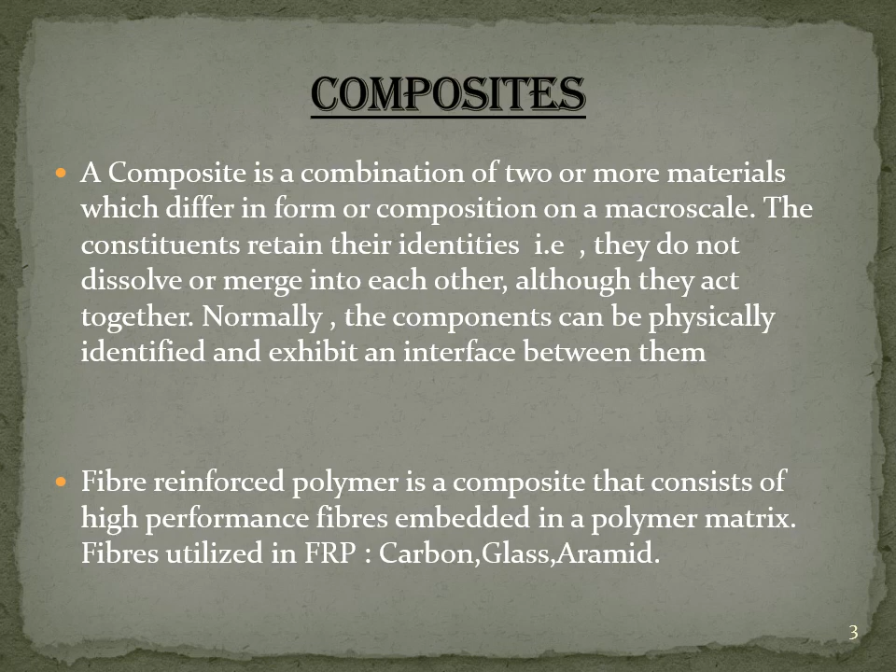They are commonly known as a new class of advanced materials which are different in many aspects from traditional materials such as metal, ceramics, plastics. They are made in such a way that they provide extremely high strength with sufficient stiffness and toughness with light weight. It is a material in which one material acts as matrix mixed with another material acting as filler, which serves the purpose of increasing strength and other mechanical properties, but at the same time reducing the overall density of this new material.

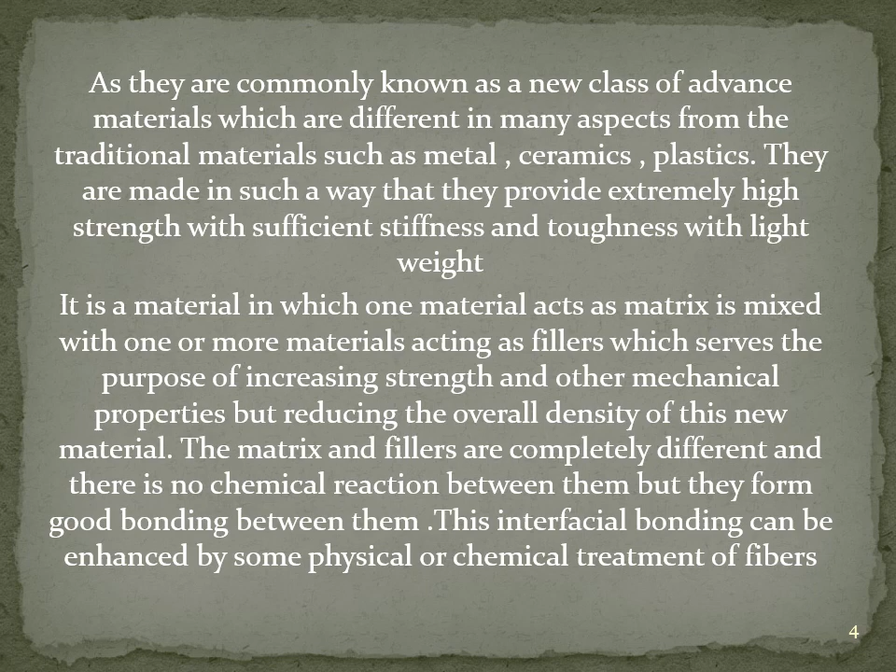The matrix and fillers are completely different and there is no chemical reaction between them, but they form good bonding between them. This interfacial bonding can be enhanced by some physical or chemical treatment of fibers.

Here is a picture. The blue cuboid represents the matrix in a continuous phase and the dark blue lines inside it represent the filler in dispersed phase. So here is a composite which is made by adding fillers into a matrix. Composite equals matrix plus filler.

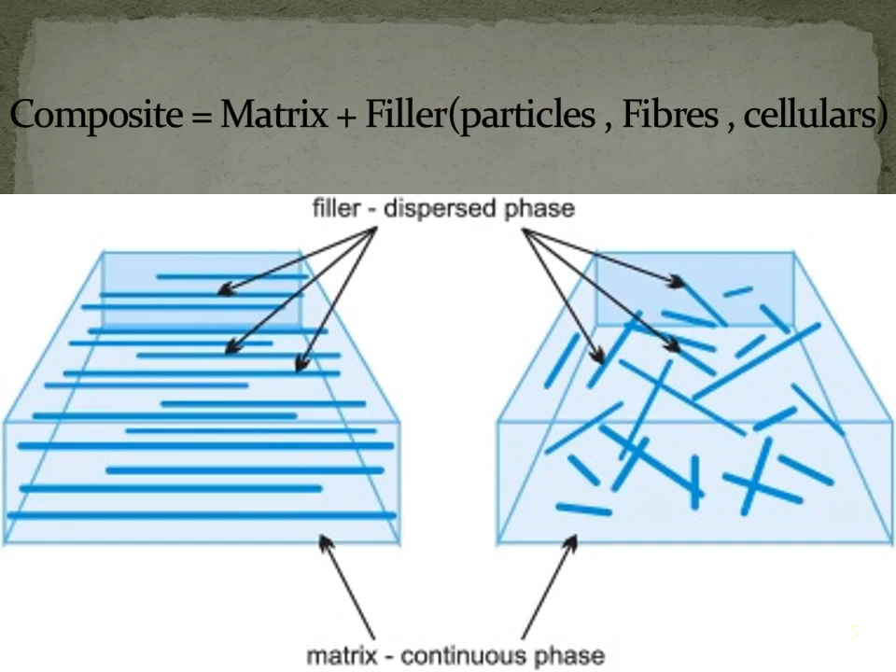What is FRP, that is fiber reinforced polymer? It is a composite material made of polymer matrix reinforced with fibers. The fibers are usually glass, carbon, aramid or basalt. Rarely other fibers such as paper, wood or asbestos have been used. The polymer is usually an epoxy, vinyl ester, polyester, or thermosetting plastic. Thermosetting plastic, as we all know, is a polymer that irreversibly becomes rigid when heated.

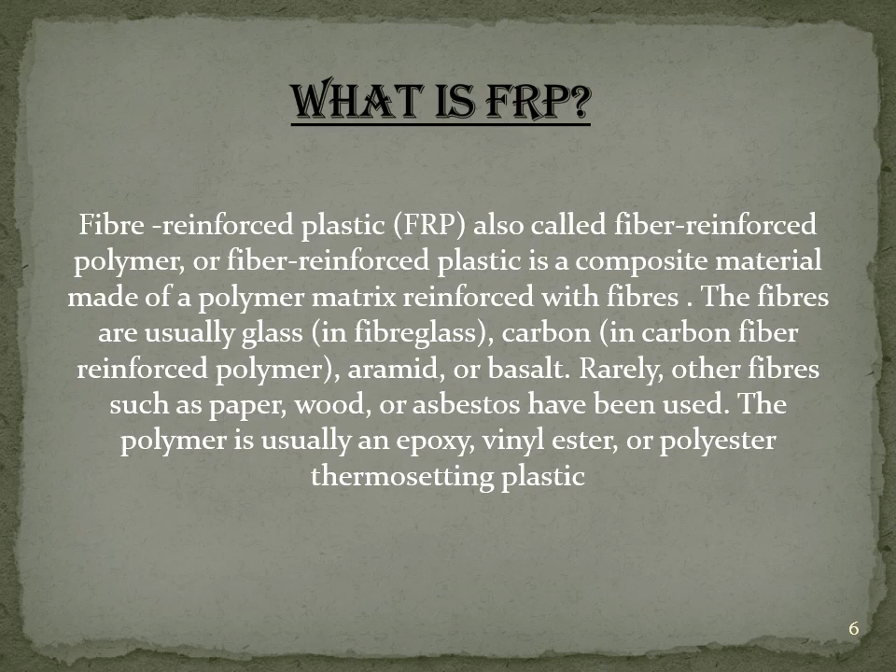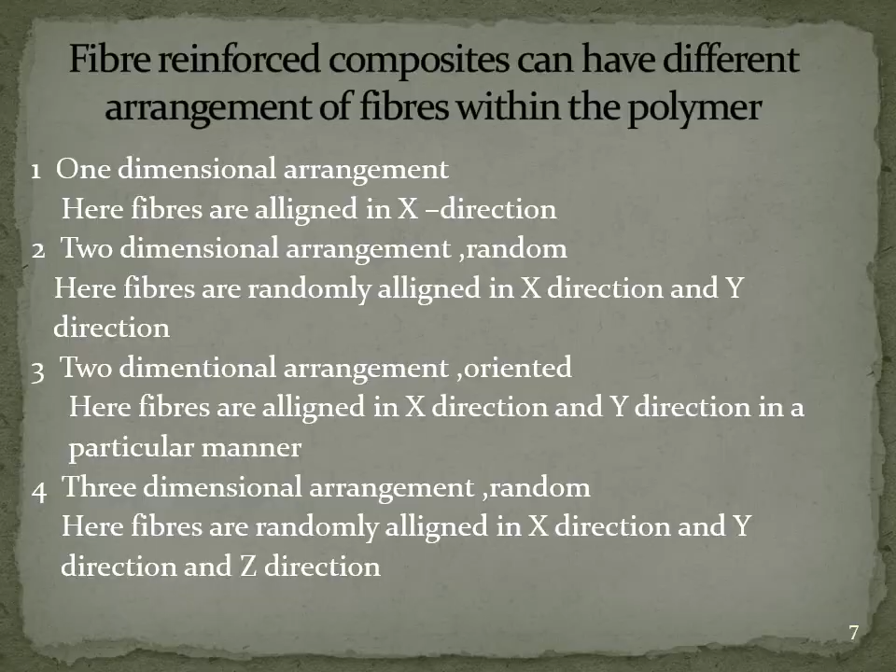Fiber reinforced composites can have different arrangements of fibers within the polymer: one-dimensional arrangement, two-dimensional arrangement, which is further classified as random and oriented, and three-dimensional arrangement. I will explain all this with the help of a diagram representing these four classifications.

Diagram A represents a matrix in one dimension, where all the fibers are aligned in the X direction. Diagram B represents a two-dimensional structure where fibers are arranged in X and Y direction but in random order. Diagram C represents fibers arranged in two-dimensional order, aligned in X and Y direction, and oriented. Figure D represents fibers aligned in X, Y and Z direction randomly.

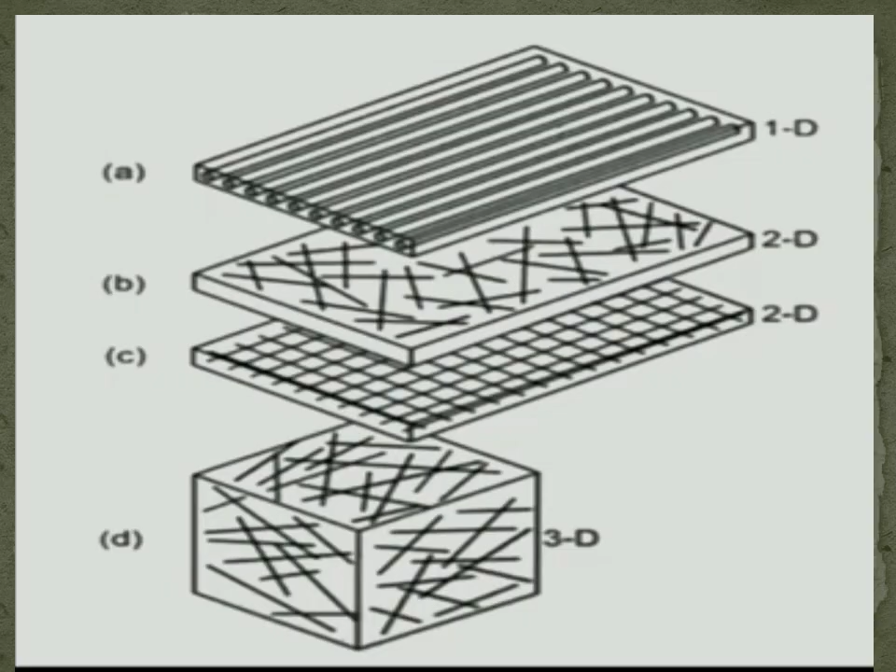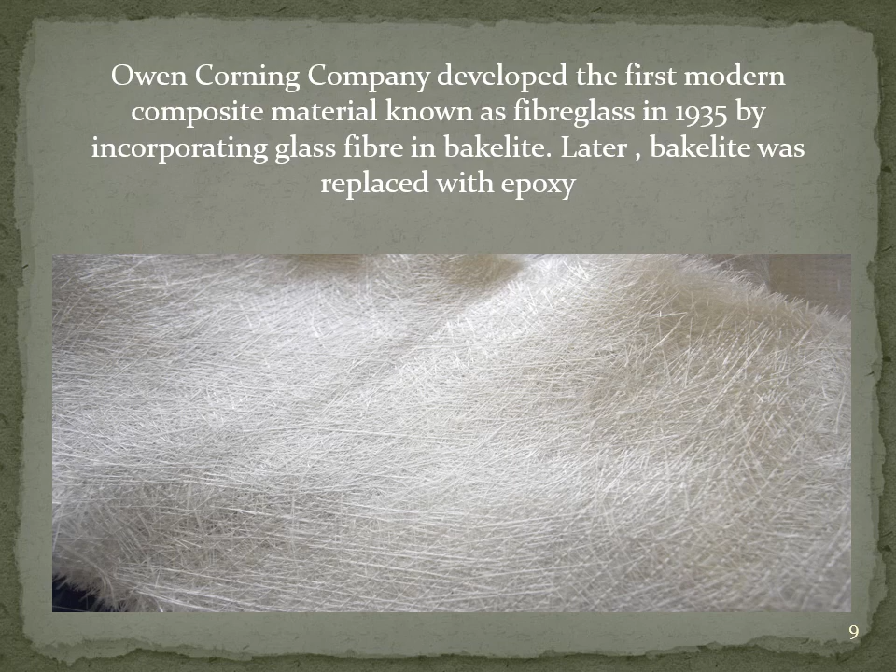Owen Corning Company developed the first modern composite material known as fiberglass in 1935 by incorporating glass fiber in bakelite. Later, bakelite was replaced with epoxy.

There are four main ingredients that fiber reinforced polymer are comprised of: resins, reinforcements, fillers, and additives or modifiers. Each ingredient is equally important and all ingredients play an important role in determining the properties of the fiber reinforced polymer.

First is resin. The primary functions of the resin are to transfer stress between the reinforcing fibers, act as a glue to hold the fibers together, and protect the fibers from mechanical and environmental damage.

Resins are divided into two major groups known as thermoset and thermoplastic. Thermoplastic resins become soft when heated and may be shaped or molded while in a heated semi-fluid state, becoming rigid when cool. Thermoset resins, on the other hand, are usually liquid or low melting point solids in their initial form.

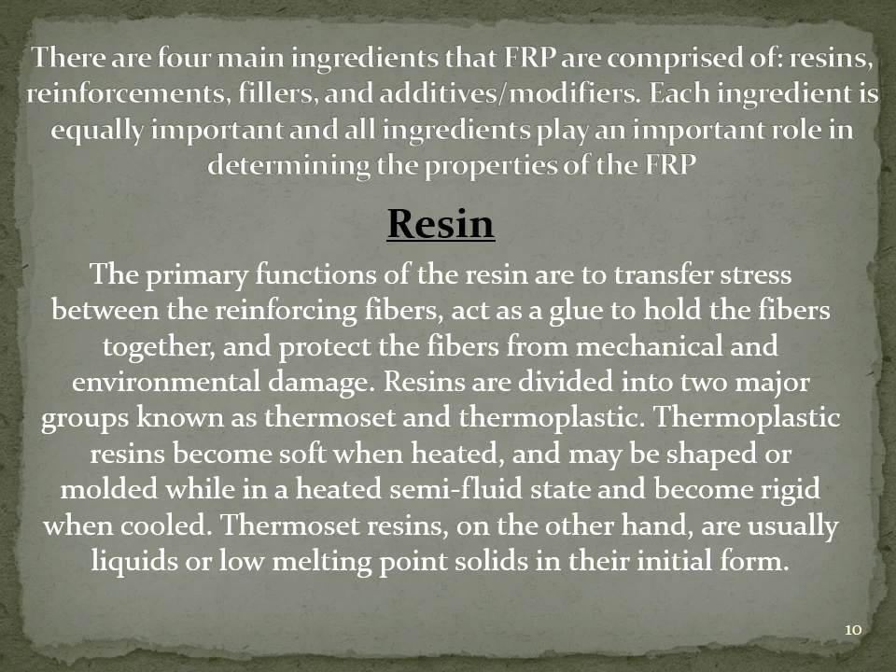Now the reinforcement, fibers and forms. Generally speaking, there are four common types of fibers broadly used in the fiber reinforced polymer industry: glass, carbon, natural, and aramid. Each has their advantage and application.

Similarly, reinforcements are available in forms to serve a wide range of processes, service and product requirements. Common materials used as reinforcement include woven roving, milled fibers, chopped strand, continuous chopped, and thermoformable mat. Reinforcement materials can be designed with unique fiber architectures and be preformed, shaped depending upon the product requirements and the manufacturing process.

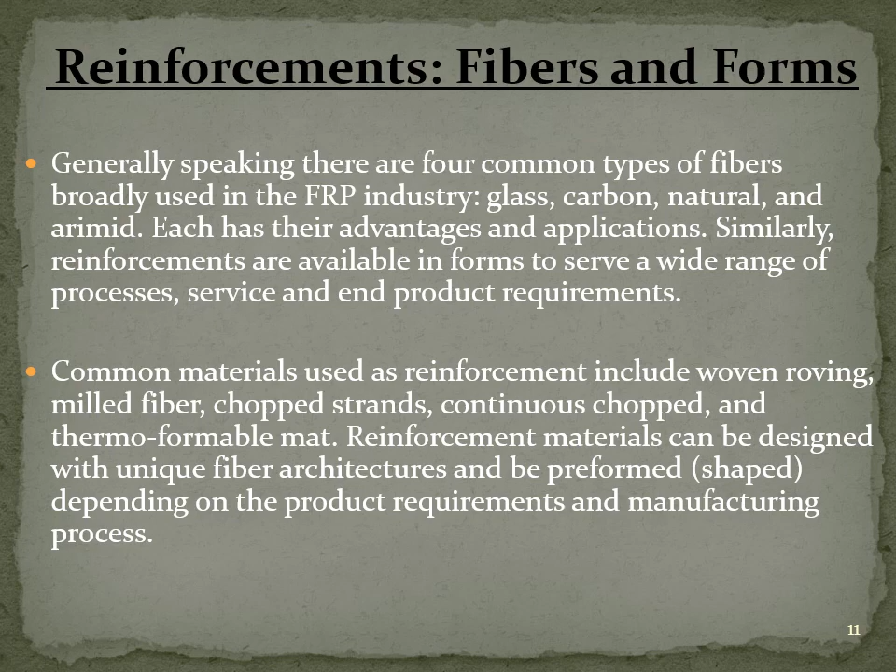Additives and modifiers perform critical functions despite their relatively low quantity by weight when compared to other ingredients such as resins, reinforcements, and fillers. Some additives used in thermoset and thermoplastic composites include low shrink or low profile when a smooth surface is required, fire resistance, air release, emission control, viscosity control, and electrical conductivity.

An important note is that fiber reinforced polymer products can be custom made for the intended use. This is very important. Understanding the intended function and service of the fiber reinforced polymer will aid the design and manufacturing process to allow for an optimal finished product, that is, corrosion resistance.

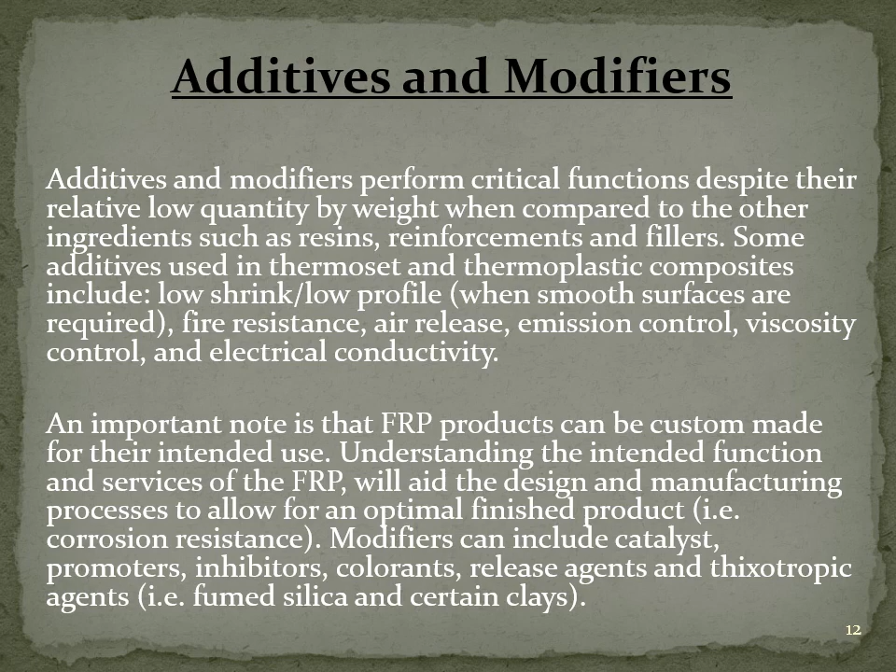Modifiers can include catalysts, promoters, inhibitors, colorants, release agents, thixotropic agents, that is fumed silica, and certain clays.

Fillers are used as process or performance aids to impart special properties to the end product. Some examples of inorganic fillers include calcium carbonate, hydrous aluminum silicate, alumina trihydrate, and calcium sulfate.

In some circumstances, fillers and additives can play a critical role in lowering the cost of the compound by diluting expensive resins and reducing the amount of reinforcements.

Furthermore, fillers and additives improve compound rheology, fiber loading uniformity, enhance mechanical and chemical performance, and reduce shrinkage.

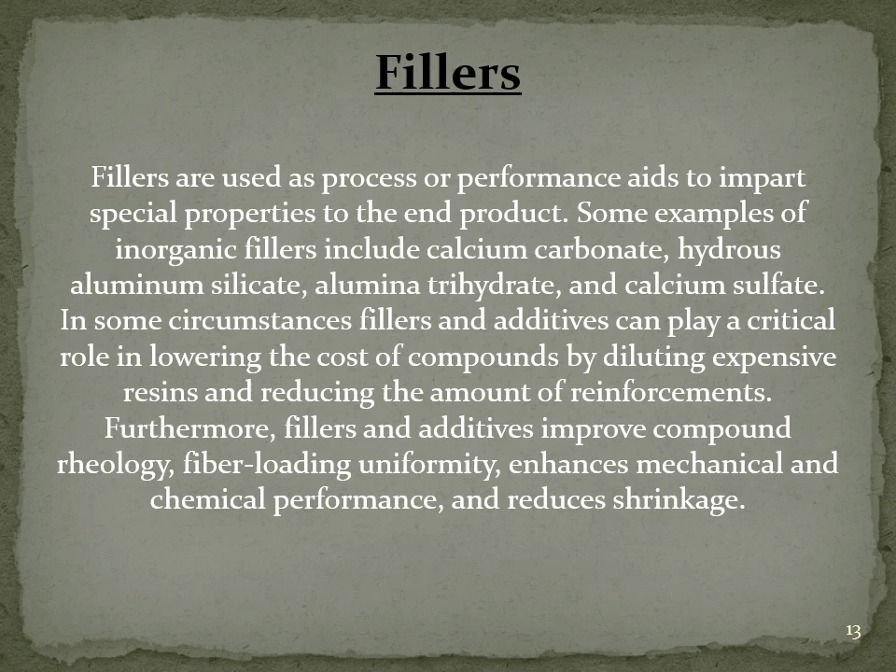Now we come to the manufacturing of fiber reinforced polymer composites. These are a type of composite plastic made up of a matrix or binding agent reinforced by a fiber material. The fiber reinforced polymer process thus entails two steps. Step number one, making the fibrous material. Step number two, bonding the material with the polymer plastic. So here are the processes.

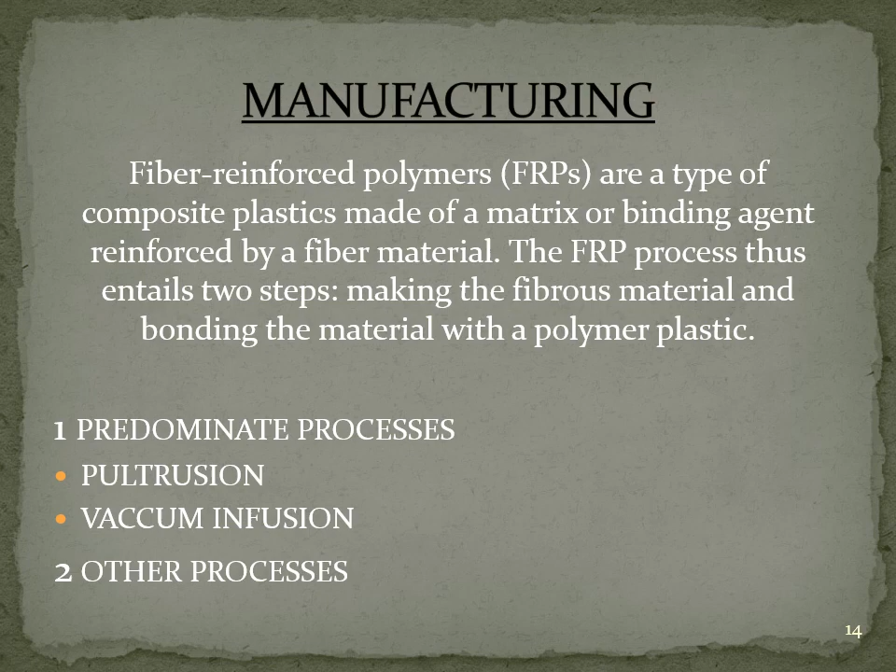Predominant processes include pultrusion, vacuum infusion, and there are many other processes. The pultrusion process involves a linear and continuous process, reinforcing pulled through a heated die. Chemical reaction occurs as it cures, polymerization. The resin saturates the reinforcement, exiting the die in a solid state and in the form of the cross section of the die.

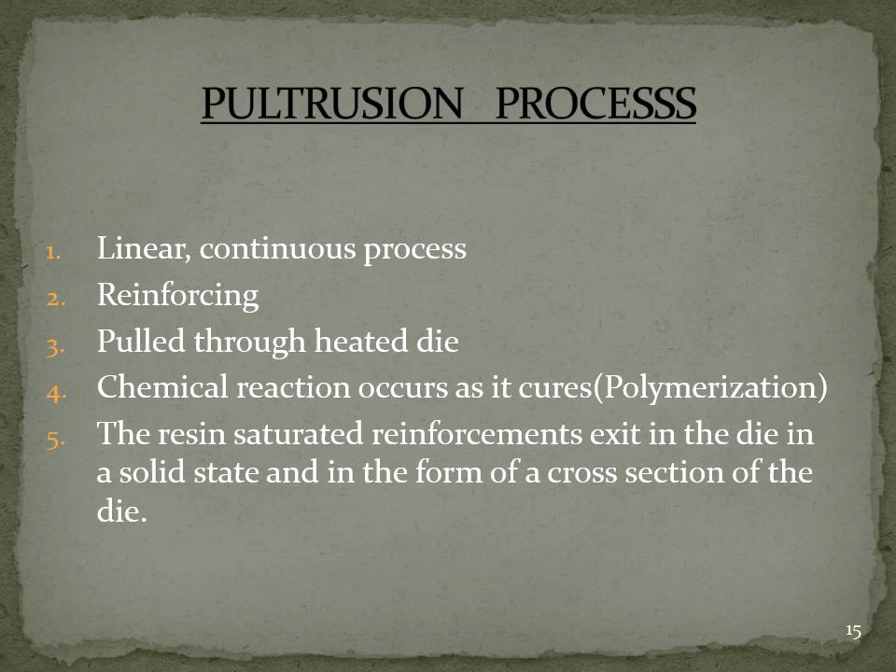Here's a diagram representing the process. And the process is a continuous process.

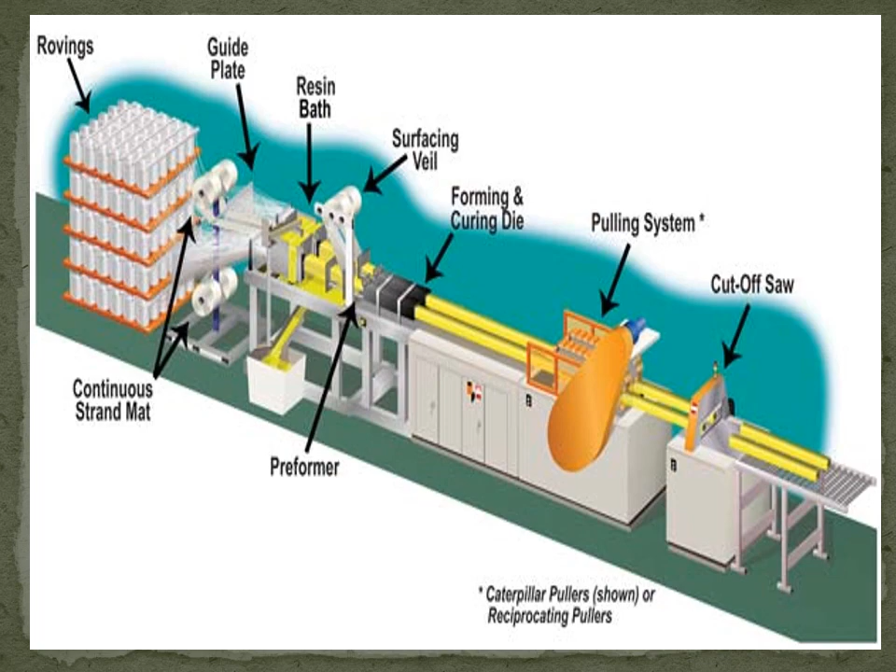Next process is vacuum infusion. The vacuum infusion process, also known as VIP, is a technique that uses vacuum pressure to drive resin into the laminate. Materials are laid dry into the mold and the vacuum is applied before resin is introduced. Once a complete vacuum is achieved, resin is literally sucked into the laminate via carefully placed tubing.

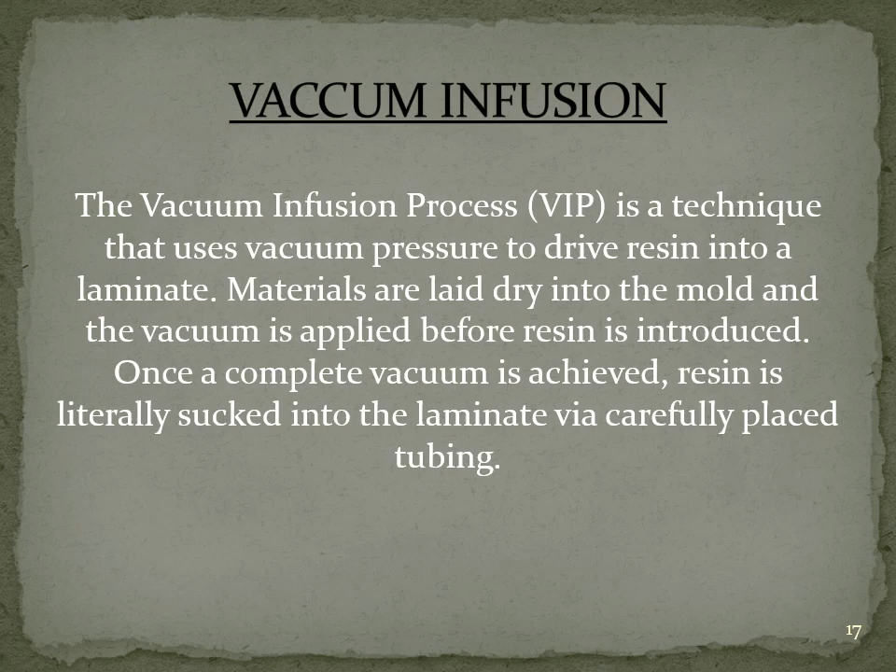Now the national specifications. ANSI Code of Standard Practice, American National Standard Code of Standard Practice for pultruded FRP structures, gives the recommendations for construction contract documents, fabrication and installation.

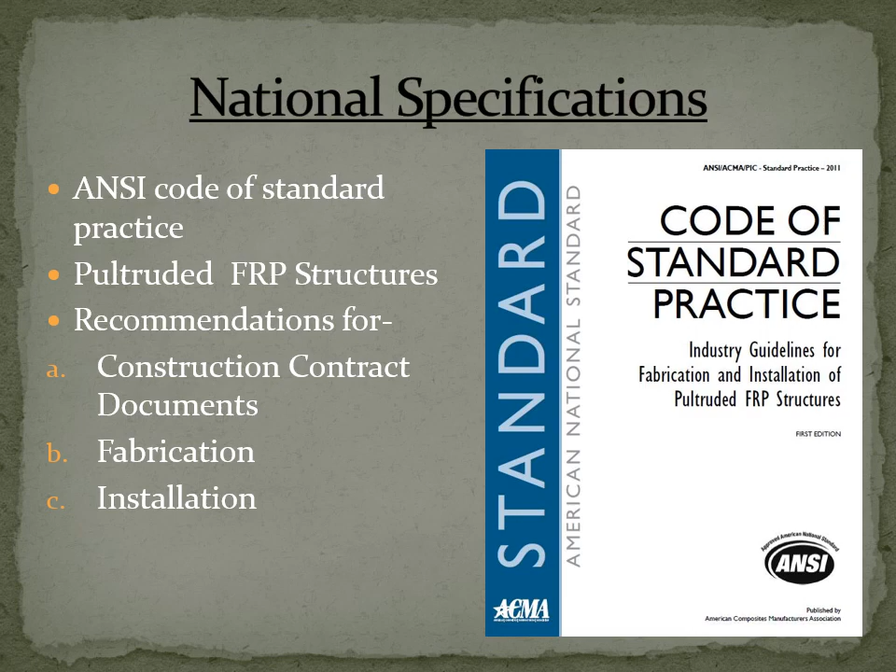For the design and construction of concrete bridge decks and railings, reinforced with glass fiber reinforced polymer reinforcing bars.

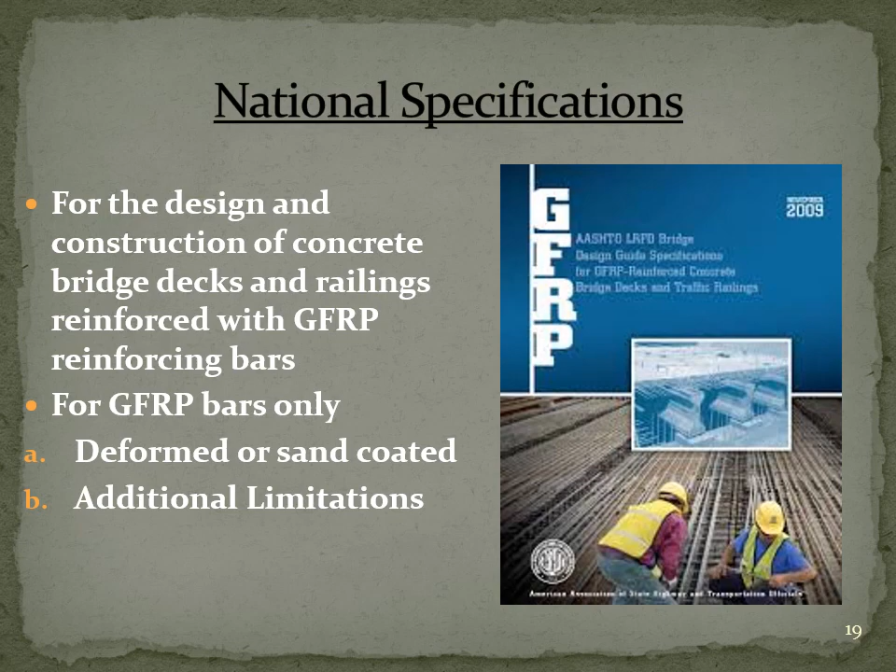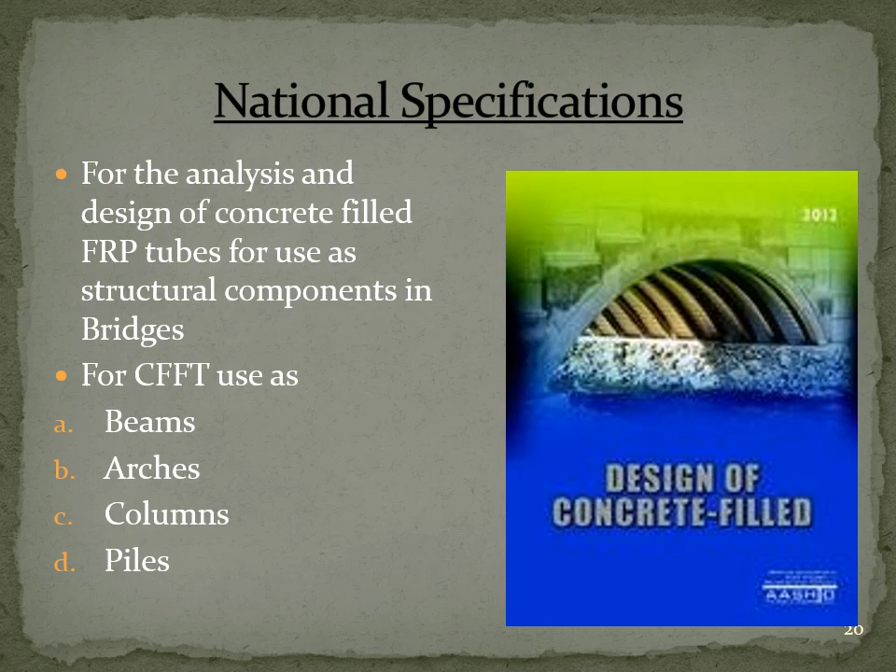For the analysis and design of concrete filled FRP tubes for use as structural components in bridges, beams, arches, columns, and piles. ACI 440 series, American Concrete Institute.

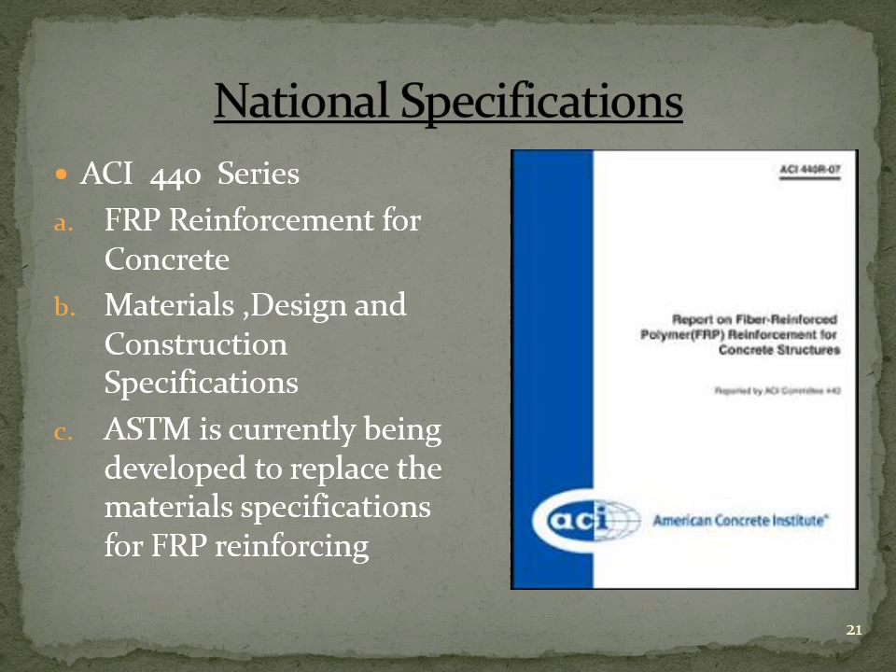ASTM is currently being developed to replace the material specifications for fiber reinforced polymer reinforcing.

Now the characteristics. It is highly resistant to chloride ion and chemical attack. Number two, its tensile strength is greater than that of steel, yet it weighs only one quarter as much. This is very important and a very big plus point of fiber reinforced polymers.

It is transparent to magnetic fields and radar frequencies. Glass fiber reinforced polymers have low electrical and thermal conductivity.

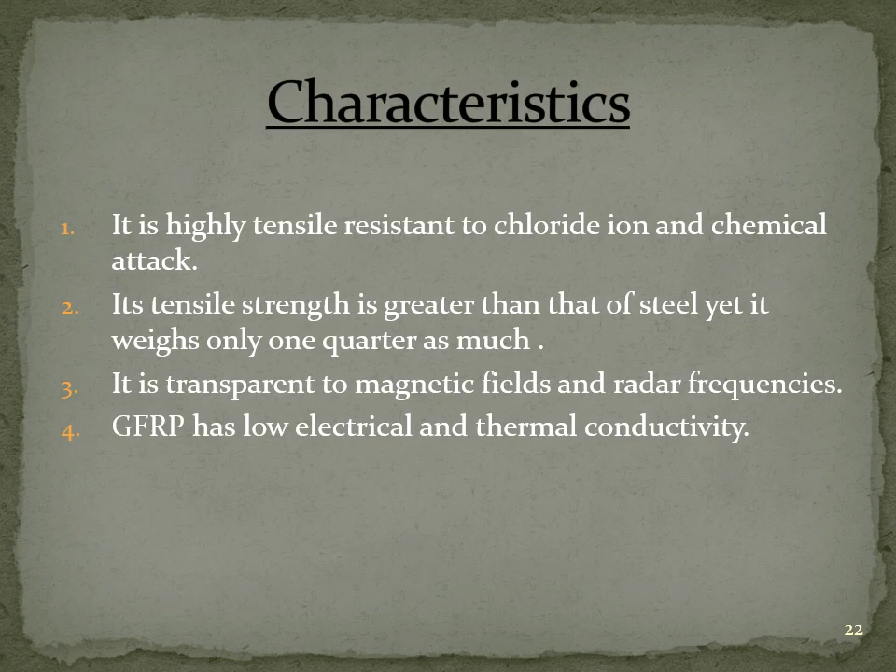Long-term durability, high strength to weight ratio. Fiber reinforced polymers are lightweight and strong. They possess a vast range of mechanical properties including tensile, flexural, impact, and compressive strength. When compared to most other metals, they can deliver more strength per unit of weight than most metals.

Their lightweight also lends itself well to logistics. It's easier to ship and install.

It is customizable. Every industry has unique problems to solve. With FRP, engineers have the ability to tailor or modify the design of their FRP to meet specific requirements. For example, consider the benefits of altering resin or glass content to optimize corrosion or abrasion resistance. You can't do this with metal.

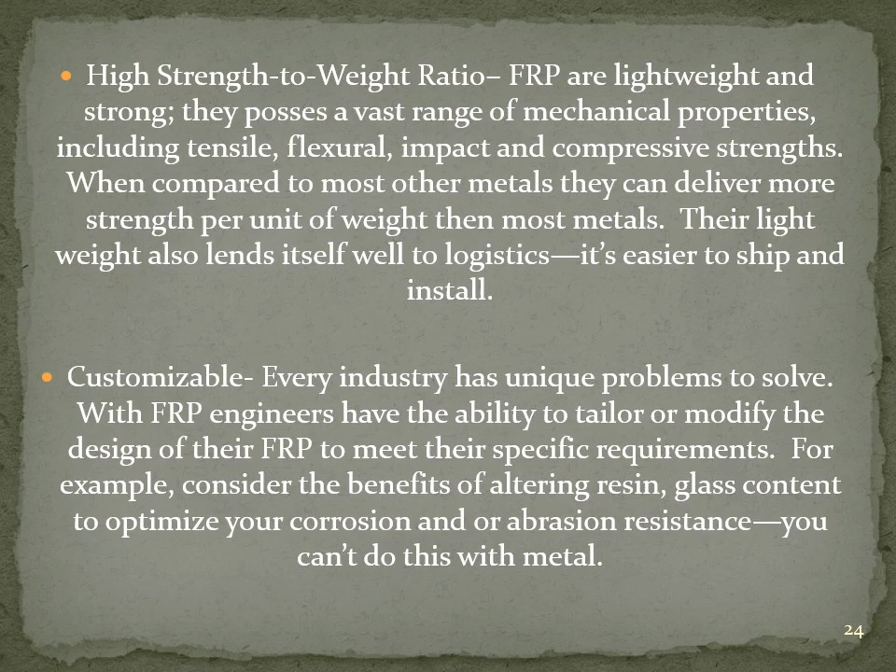Anisotropic: engineers can maximize the performance and efficiency of the structure when they take advantage of the inherent anisotropic properties of fiber reinforced polymer. Because the maximum strength is in the direction of the fiber reinforcement, engineers can optimize the design to maximize the materials and overall performance of the structure.

High tensile strength with low modulus of elasticity. Fiber reinforced polymer has high tensile strength due to its composite properties. Engineers can specify unique resin and fiber reinforcement compositions when working with fiber reinforced polymer manufacturers. The design control inherent to FRP will enhance performance and can be realized when working with composites, not metals.

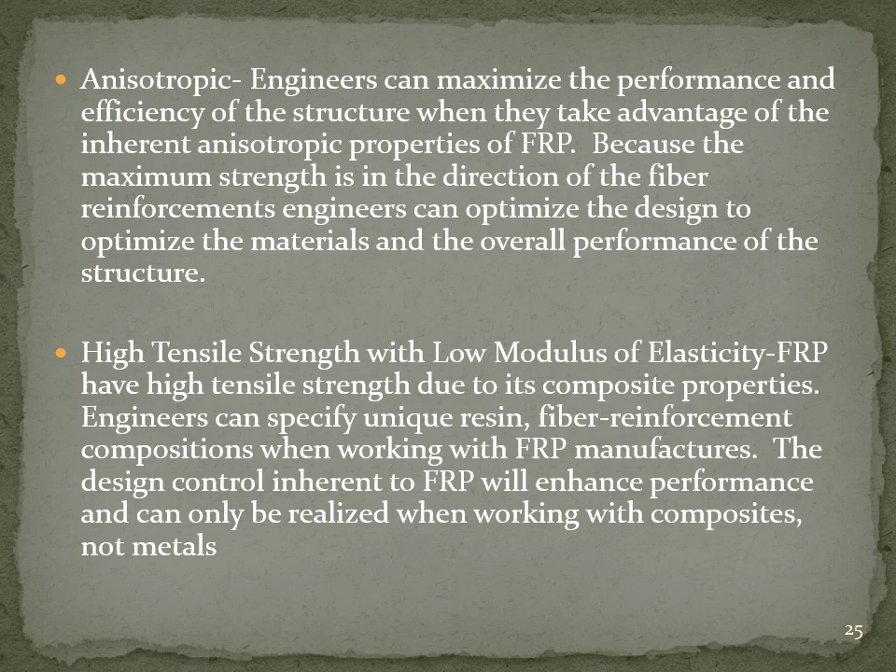There are many other reasons one should consider using fiber reinforced polymers. For example, they offer high dielectric strength, thermal cycling, dimensional stability, impact resistance, and low coefficient of friction. The real gem of FRP is that they are customizable and can be designed and modified to meet almost any chemical or physical requirement. This is primarily why fiber reinforced polymers have been chosen by so many industries as a material for corrosion resistance applications. Where other materials fail, FRP thrives. With so many benefits, it's no wonder that FRP are viewed by so many as a cost-effective alternative to conventional materials.

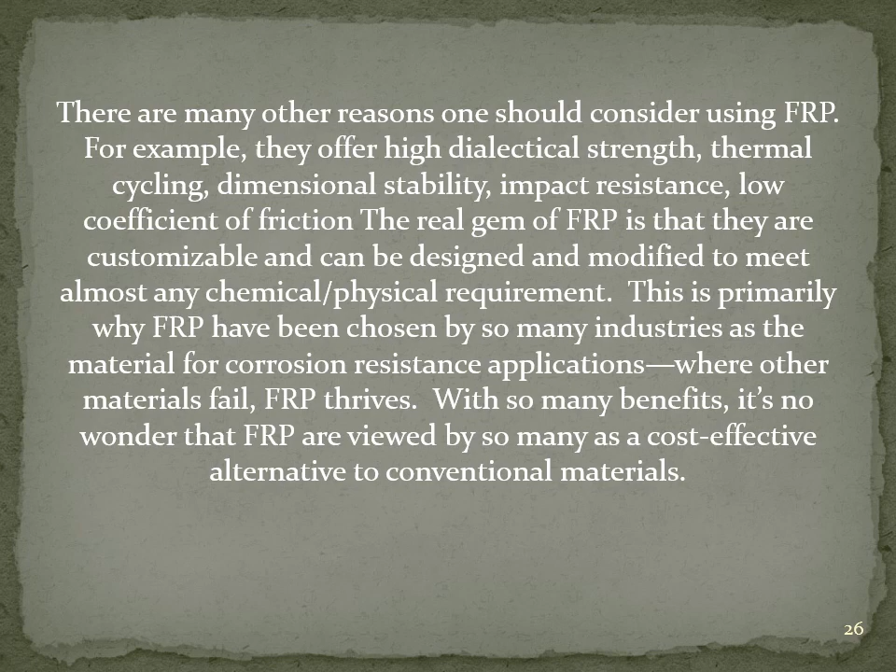Now with plus points, there are a few negative points also. So, degradation factors: acids. Hydrogen replaces alkali and other positive mobile ions in glass. Salts affect FRP similarly to acids. Temperature affects rates of moisture absorption and chemical reactions.

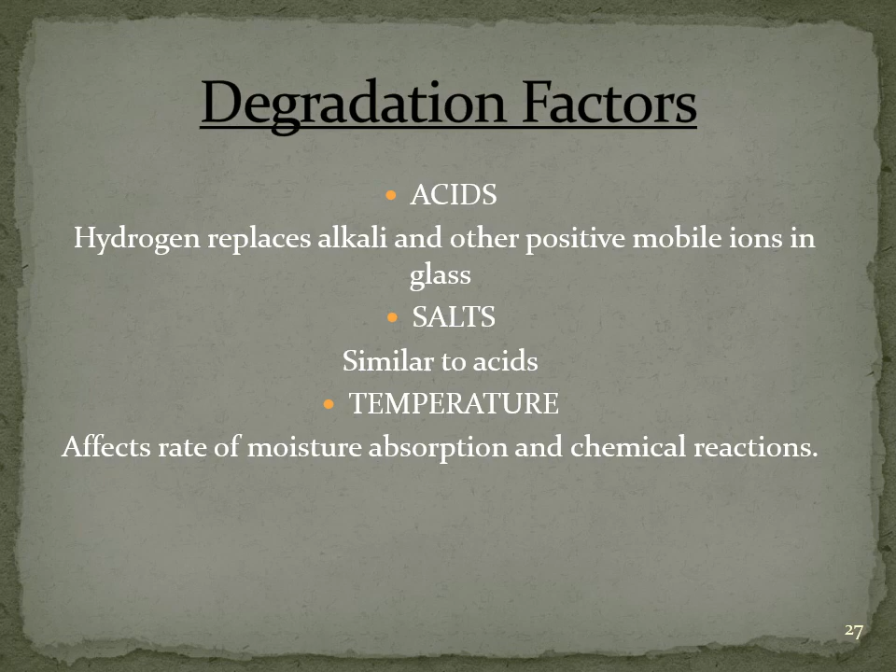FRP initiatives - these are a few initiatives by fiber reinforced polymers: structural shapes such as fender systems, piles, and composite beams. Concrete reinforcing such as reinforcing bar and pre-stressing strands, and external reinforcing.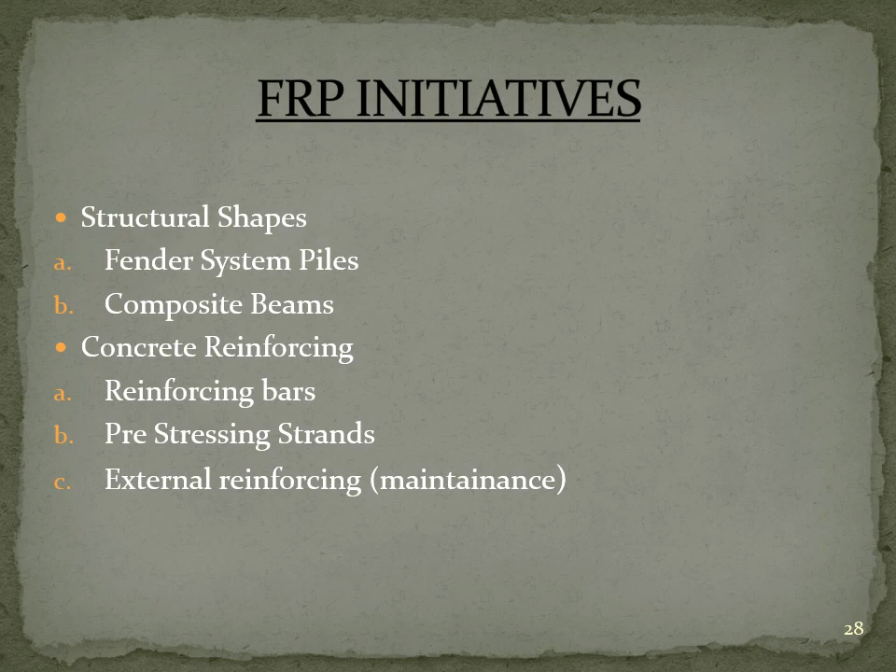Now, Florida Department of Transportation initiatives. The deterioration of reinforcing and pre-stressing steel within concrete is one of the prime causes of failure of concrete structures. In addition to being exposed to weather, concrete transportation structures in Florida are also commonly located in aggressive environments such as marine locations and inland water crossings where the water is acidic. Cracks in concrete create paths for the agents of the aggressive environment to reach the reinforcing or pre-stressing steel and begin the corrosive oxidation process.

An innovative approach to combat this major issue is to replace traditional steel bar and strand reinforcement with fiber reinforced polymer.

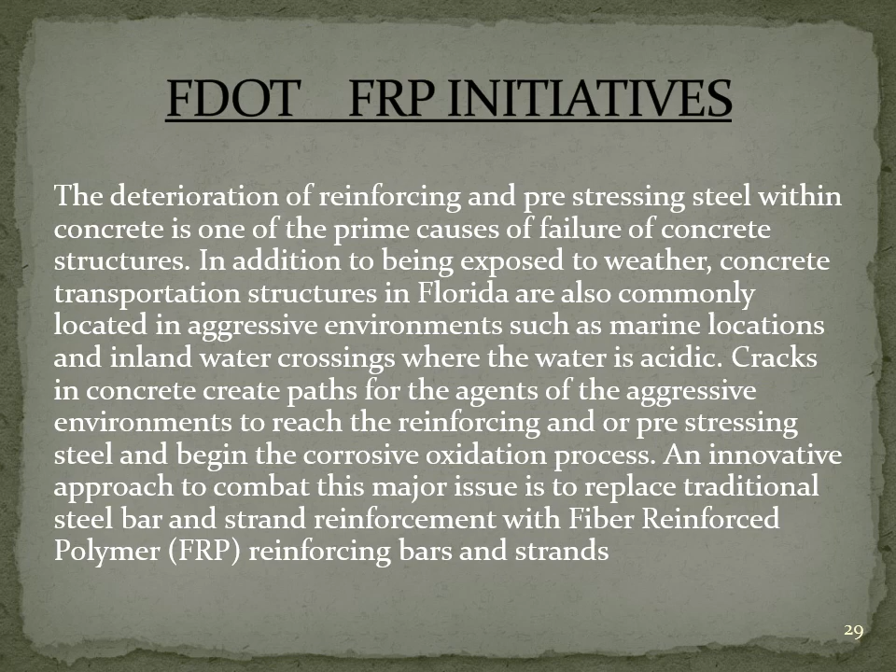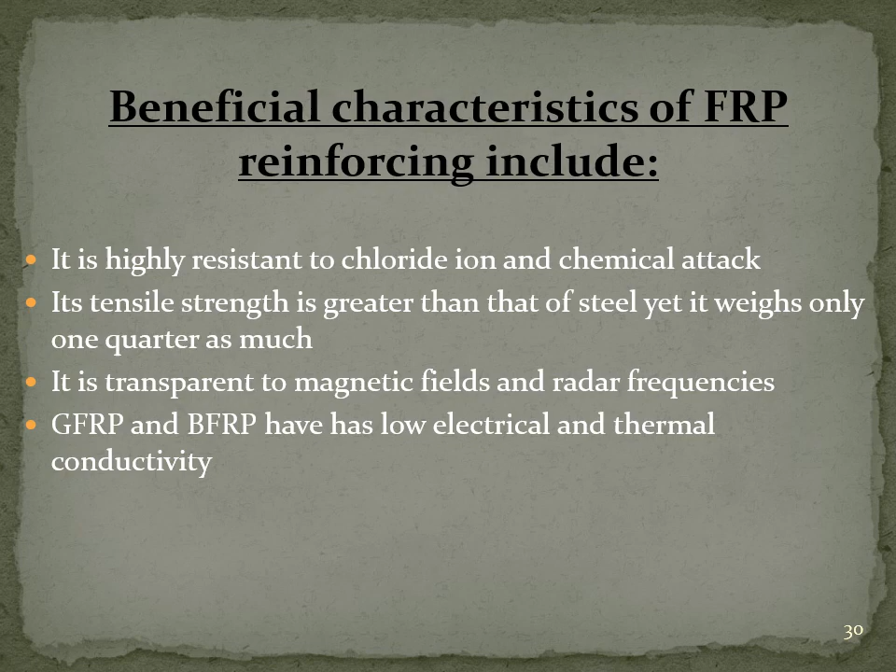Beneficial characteristics: it is highly resistant to chloride ion, as we all know. Its tensile strength is greater than that of steel, yet it weighs only one-fourth as much. It's transparent to magnetic fields, and has low electrical and thermal conductivity.

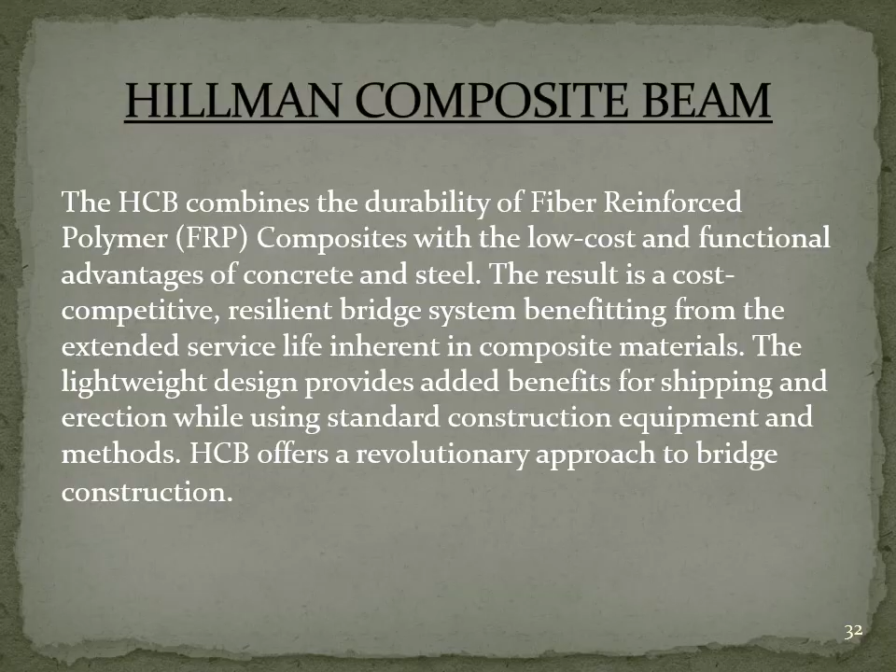The Florida Department of Transportation study of 54 bridge projects in District 7 showed that corrosion was responsible for three-fourths of maintenance cost on average. In response, Florida Department of Transportation is constantly seeking materials and design advances that reduce cost across the lifetime of a bridge.

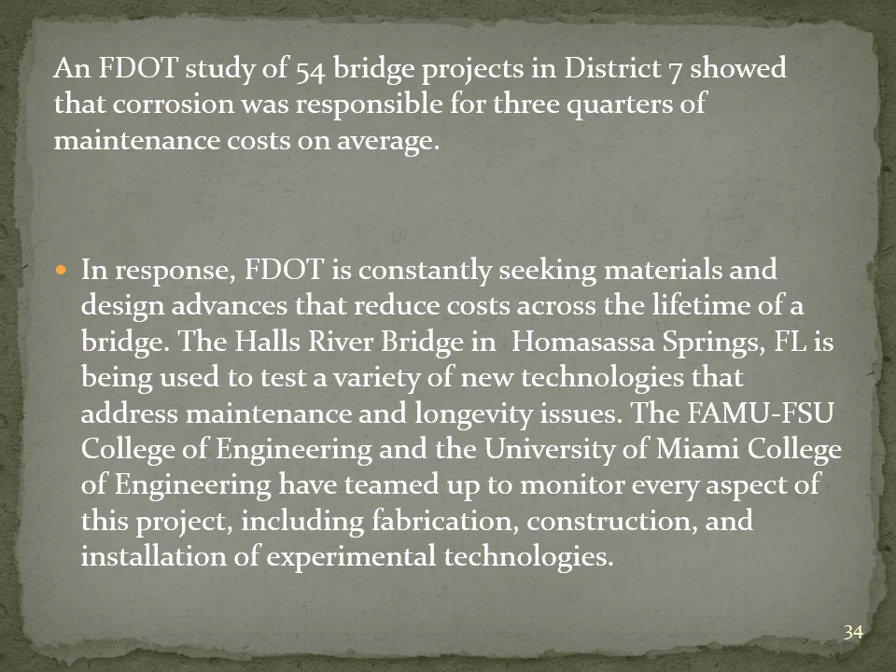From the pilings to the deck and everything between, every part of the new bridge includes some type of fiber reinforced polymer element. The concrete piles that support the bridge are pre-stressed with carbon fiber composite cables. The hybrid composite beams that will support the bridge deck have been used in a dozen bridges nationally, but these will be the first in Florida.

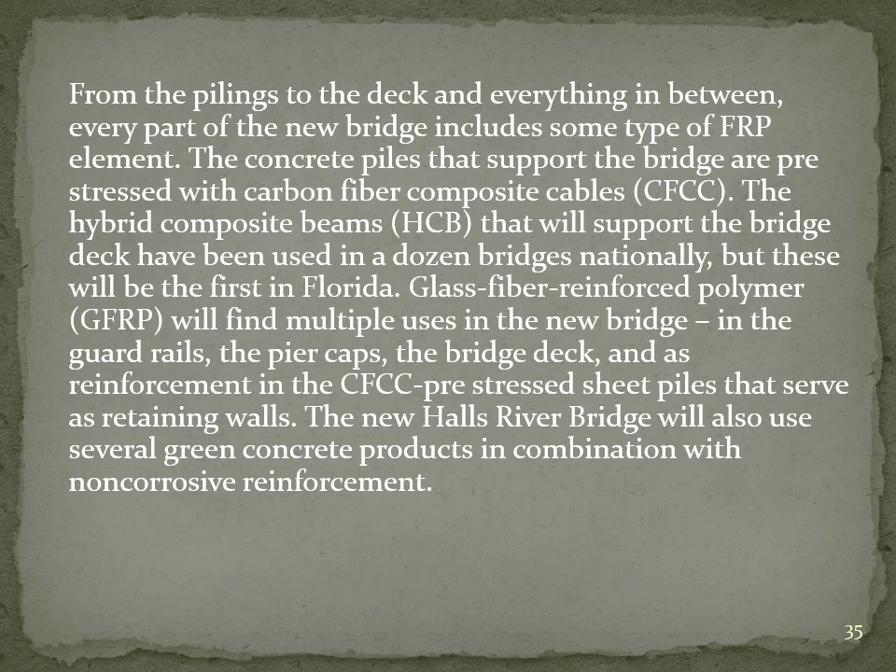Glass fiber reinforced polymer will find multiple uses in the new bridge: in the guardrails, the pier caps, the bridge deck, and as reinforcement in the CFCC pre-stressed sheet piles that will serve as retaining walls. The new Halls River Bridge will also use several green concrete products in combination with non-corrosive reinforcement.

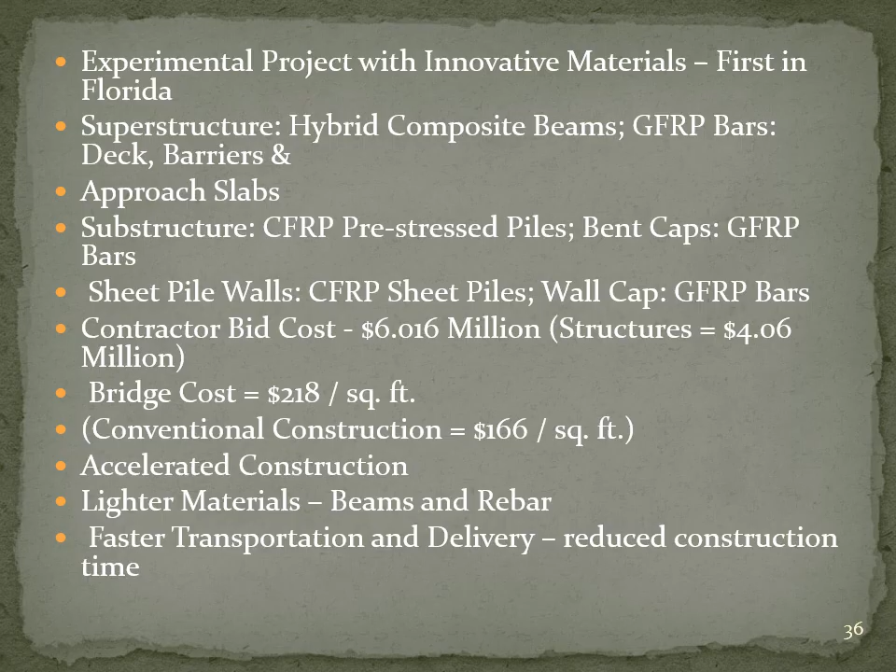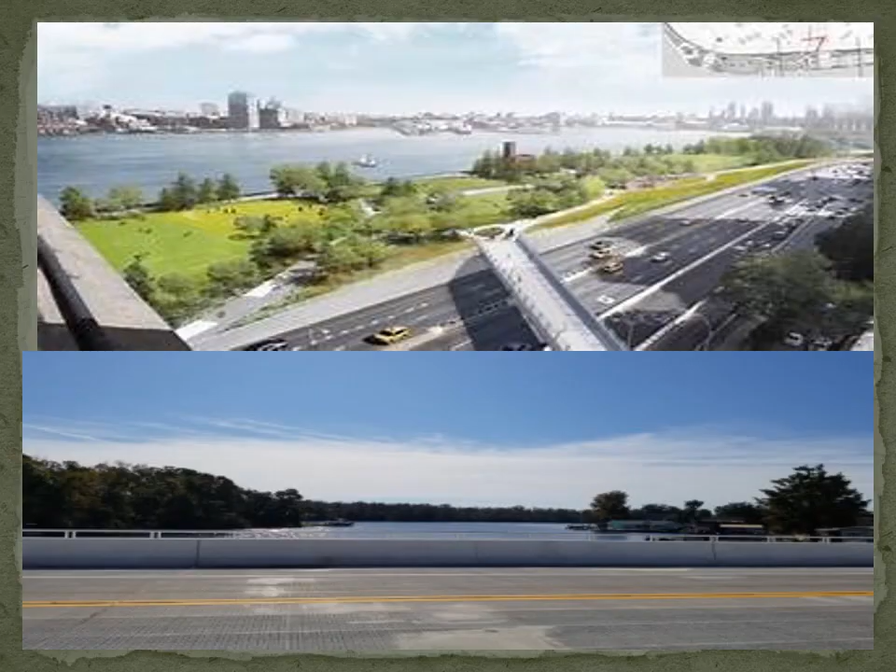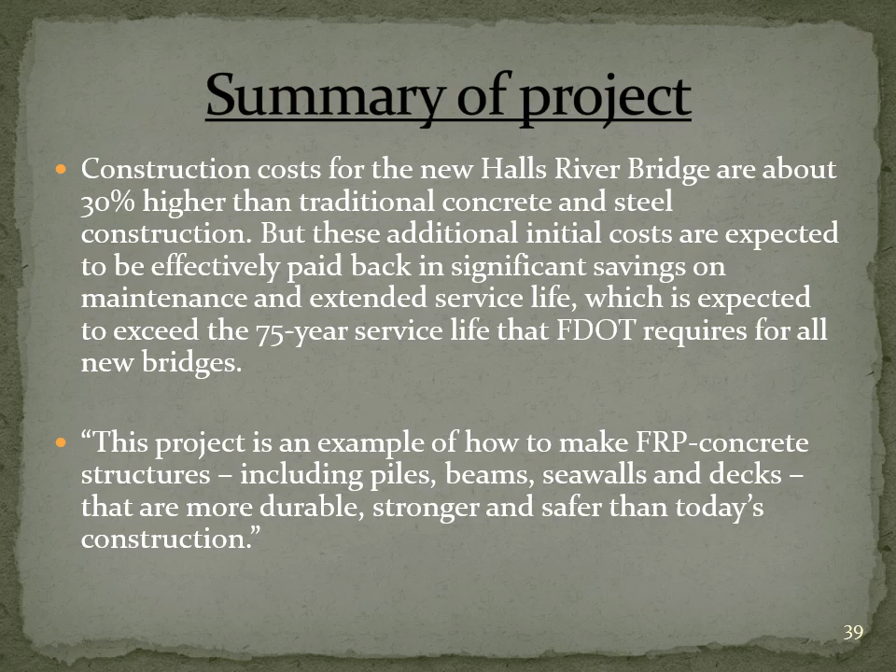Now I want to summarize by saying that construction costs for the new Halls River Bridge are about 30% higher than traditional concrete and steel construction. But these additional initial costs are expected to be effectively paid back in significant savings on maintenance and extended service life, which is expected to exceed the 75-year service life that Florida Department of Transportation requires for all new bridges. This project is an example of how to make fiber reinforced polymer concrete structures, including piles, beams, seawalls, and decks, that are more durable, stronger, and safer than today's construction.

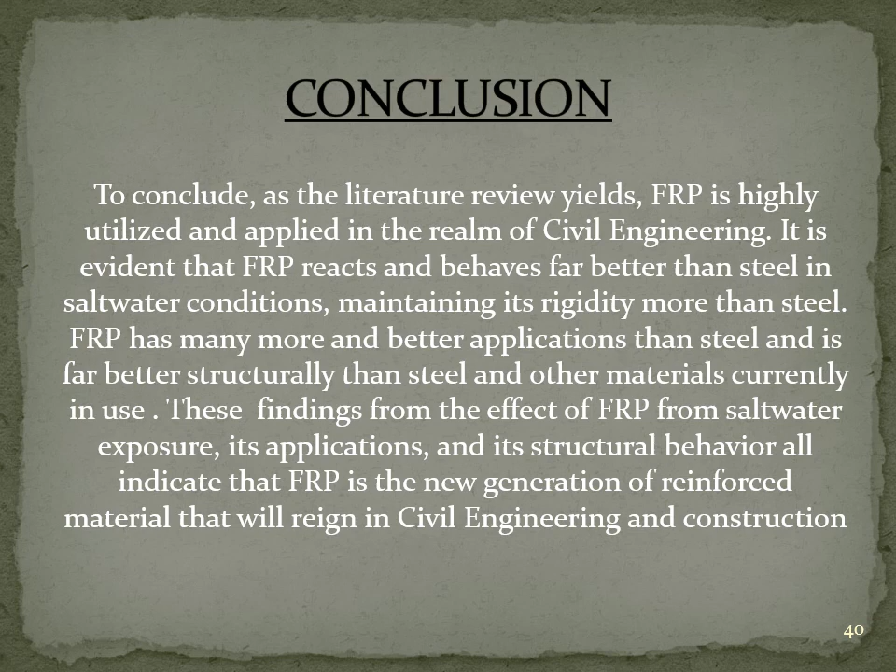Conclusion. To conclude, as the literature review yields, fiber reinforced polymer is highly utilized and applied in the realm of civil engineering. It is evident that fiber reinforced polymer reacts and behaves far better than steel in saltwater conditions, maintaining its rigidity more than steel. Fiber reinforced polymer has many more and better applications than steel and is far better structurally than steel and other materials currently in use. These findings from the effect of fiber reinforced polymer from saltwater exposure, its application, and its structural behavior all indicate that fiber reinforced polymer is the new generation of reinforced material that will reign in civil engineering and construction.